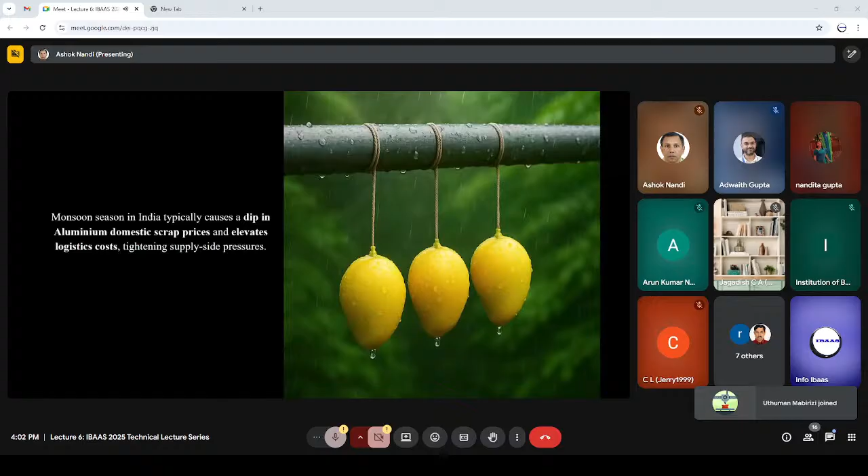A quick overview about the aluminium market in general. I'm going to talk about four aspects: the aluminium powder feedstock, the aluminium alloy additive manufacturing market, the powder bed fusion market, and the AlSi10Mg and other aluminium alloys, how they are optimized and the market around it.

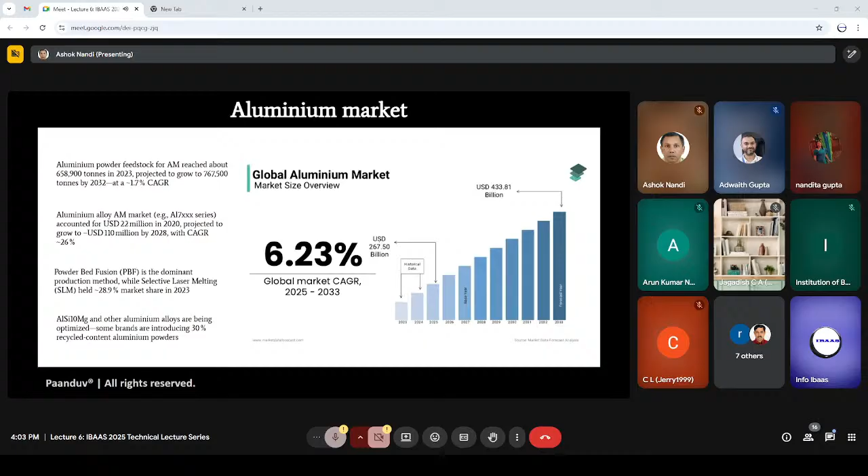If we look at different growth rates, they go all the way from 1.7% up to 30%. But on average, this global aluminium market is growing at a CAGR of 6.23% as predicted for the next 8 years.

Additively manufactured aluminium parts are high performance and offer many interesting mechanical and chemical properties. They have a very high strength to weight ratio and are weather resistant. They are less rigid compared to steel, and there are many other benefits that go around with the aluminium alloys. In fact, when we use cars, there are a lot of components already made of aluminium alloys.

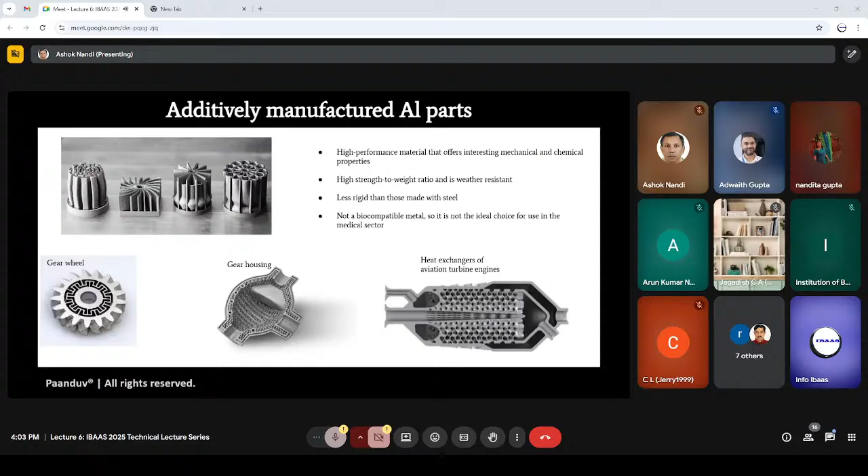However, when it comes to the AM printability or the processability of aluminium alloys, it can be quite challenging. But with challenges comes a lot of scope for research and development and further improving the way aluminium alloys are currently used. For example, when it comes to the printability of pure aluminium, it's quite a daunting task.

However, when it comes to AlSi10Mg and other alloys, it could be an excellent option for laser powder bed fusion type additive manufacturing. Again, if you try to do multi-material welding, for example aluminium and copper alloys, or aluminium, zinc and magnesium alloys, the printability is again poor. It causes cracking, oxidation, poor weldability and problems like that.

However, again, when you talk about aluminium, magnesium, scandium and zirconium sort of multi-material welding, then you can again have excellent printability using either direct energy deposition or laser powder bed fusion sort of additive manufacturing processes.

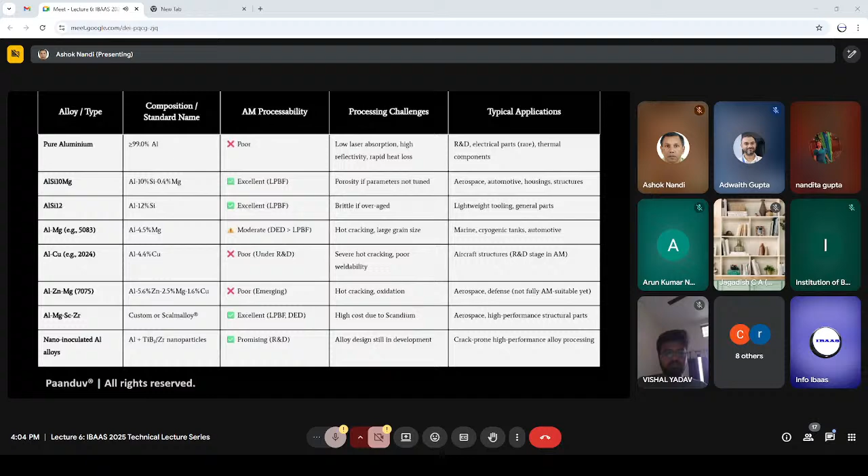When we talk about defects in additive manufacturing, irrespective of whether it's an aluminium alloy or some other alloy, we typically encounter the same sort of defects. They can be more pronounced in the case of aluminium, but the defects remain nevertheless.

For example, we can talk about keyholes, which is one of the most scary defects that all 3D printer users want to avoid: spattering, liquid breakup, extreme porosities whether due to keyhole or other modes of heating, vapor depression, vapor plume ejection, humps that reduce the surface finish of your part, and many other defects that we encounter on a regular basis.

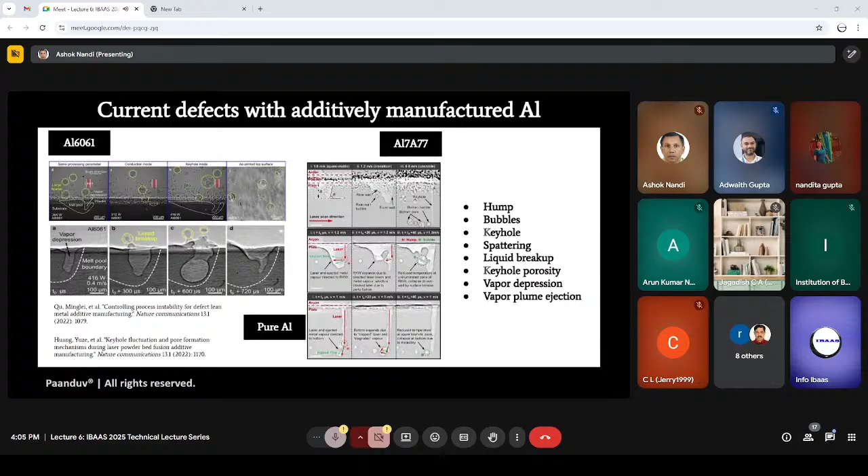Talking a little bit more about these defects, specifically for AlSi10Mg, which is one of the alloys of interest for today's talk. There are many porosity and poor melt pool dynamics related defects. There could be metallurgical pores, keyhole pores, a lot of unmelted powder particles, poor bonding effect, and you name it. Basically every defect that you encounter in additive manufacturing in general can be seen when it comes to AlSi10Mg alloy.

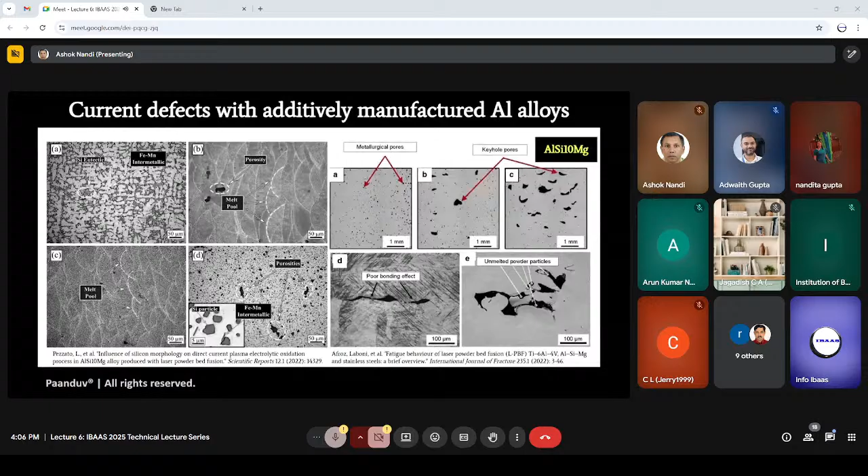This alloy has a lot of applications in aerospace and defense, but it also comes with its own set of defects. There are many ways of getting rid of these defects encountered in additive manufacturing in general, and the same methodologies are also applicable to aluminium and its alloys.

A typical aspiration for an AM process engineer is to provide a sustainable technology, in this case additive manufacturing, to prevent wastage of material not only during experimentation but also during production, to achieve a heterogeneous fine grain microstructure which directly corresponds to the mechanical strength of the built part, and to produce a near net shaped component requiring minimal post processing and finishing. While these are very noble aspirations, a significant amount of experimentation goes into attaining these goals.

At the core of it, much of the experimentation goes around understanding the melt pool geometry and the microstructures using fancy experimental machines. For example, the shape and size of a track relating to build rates, interlayer adhesion, powder layer interaction, powder laser interaction, temperature profile and gradients, and other physics. Their interplay is seen when observing melt pool dynamics using machinery, which unfortunately is expensive but required. Using this data collected from experiments, you can optimize your process parameters.

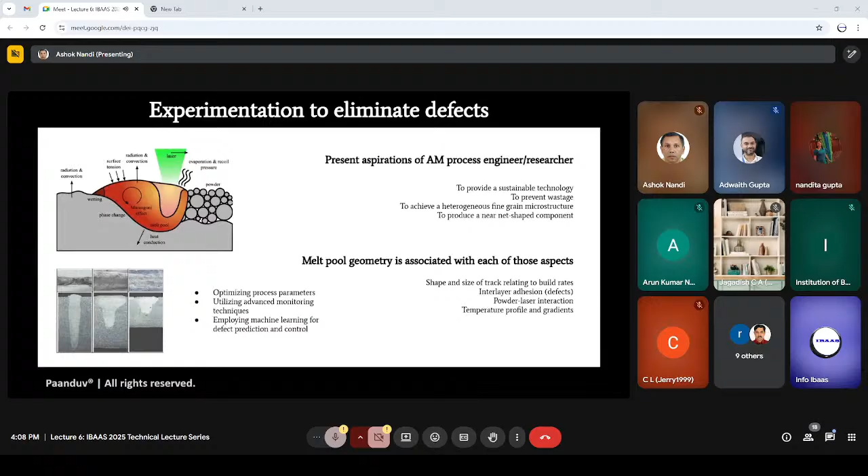You can even employ machine learning from the collected data, and overall the AM process engineer or researcher can attain his goals.

The challenges in experimentation are of course there. The cost of such experimental machines can be quite huge, as can the resources needed for the expertise to operate them. The cycle time could be in the order of months before you get data back from experiments. Then there are material related challenges, process control and reproducibility, human errors, experimental setup constraints, data generation, storage and analysis, defect control and characterization, validation and benchmarking, and the iterative nature of additive manufacturing research.

At the rate at which new materials are innovated at the R&D level, and the speed at which the overall additive manufacturing market is progressing, there's a very fast iteration needed for these sorts of experiments.

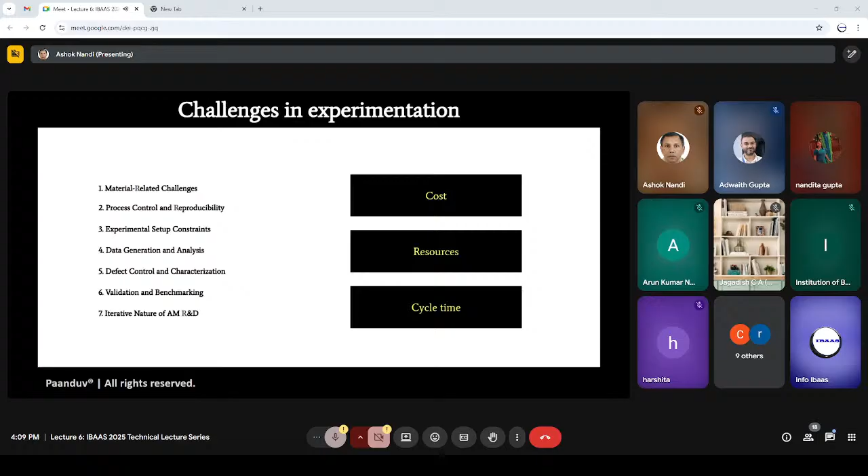The second approach, which can run hand in hand with experiments and significantly take off the load from the experimental work and its associated errors, is high fidelity multi-scale simulation, which can eliminate defects from build.

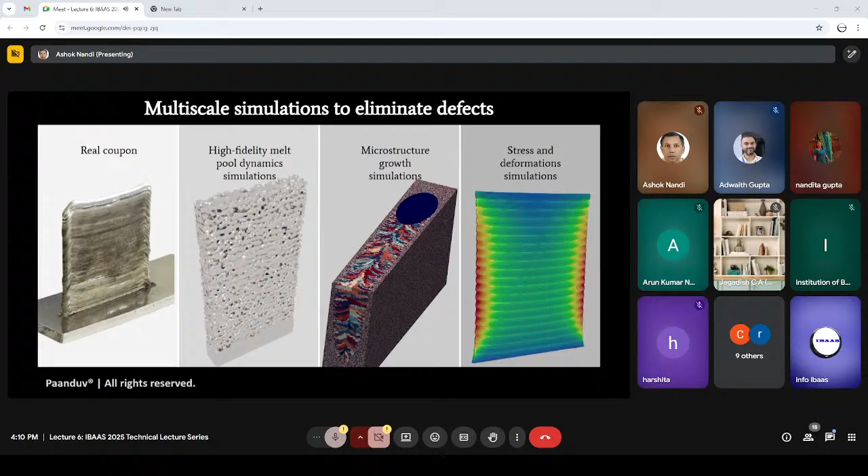The fourth is the stress and deformation simulation, data associated with thermomechanical stress analysis using AM PravaH. In short, predictive modeling is quite capable of capturing some of the very hidden details about defects that can happen in 3D printing processes. It can guide us and point us to the right direction as to what must be changed or optimized in order to produce a very good build, irrespective of the process.

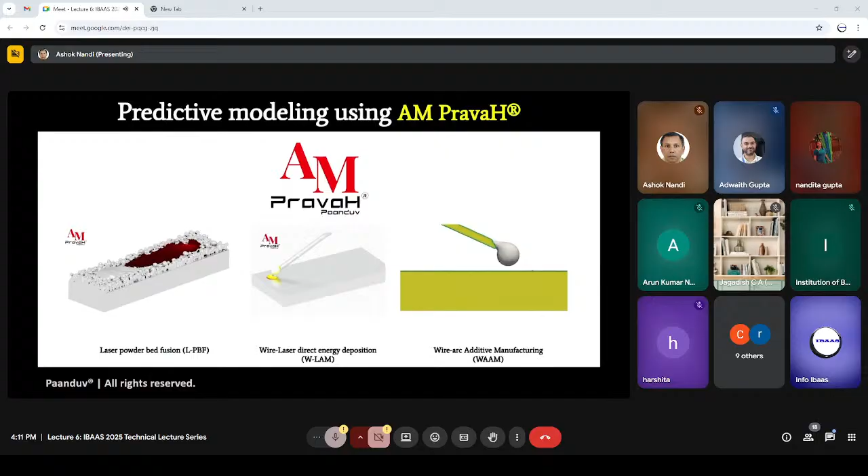Something very tricky to do in experiments is laser beam shaping, because there are standard laser machines that exist all over the world. If you want to make a square laser because you think those lasers are the best in the world, there's simply no way to experiment. The only way left in certain scenarios is through simulations.

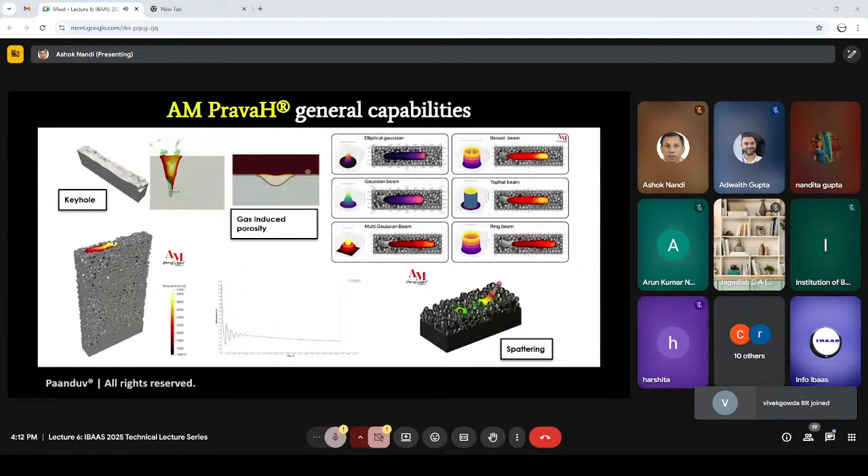The last one is spattering. This is again a very difficult process to capture in experiments given the very high temperatures at which additive manufacturing processes operate, easily 3,000 to 4,000 degrees Celsius, with a very hot vapor plume inside the chamber.

Everything we saw on the previous slide, those defects were captured using melt pool dynamics alone. But there's a solidification aspect as well associated with additive manufacturing processes. That's where microstructure evolution, how your grains are orienting, reorienting, or misoriented based on the movement of the laser over a particular alloy, is very critical.

You want to look at the crystallographic texture, you want to look at inverse pole figures. There are, of course, EBSD machines that can give you these sort of detailed data. But those machines are very expensive. They cannot be operated on a regular basis. They have a huge cycle time for processing the data. And despite all that, you can only probably run one or two experiments every month.

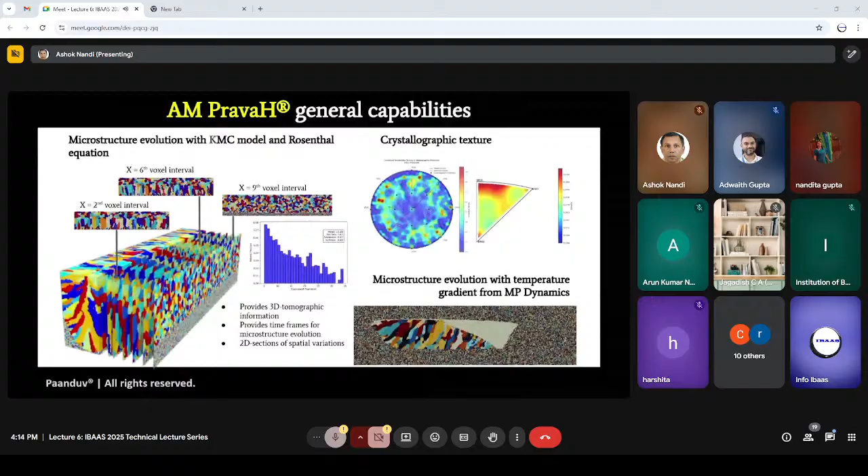But with PravaH's capability of predicting microstructures using kinetic Monte Carlo models along with other coupled models, these results can be generated in a much easier manner in a very short span of time, and you can save a lot of money on that. In fact, everything that you see on this screen is generated from PravaH.

Now, it is very important to couple the melt pool dynamics, which is happening at a continuum scale, where all your momentum conservation, energy conservation, mass conservation, phase change, and solidification are happening. It is very important to couple that entire gamut of computational fluid dynamics with microstructure data.

So the flow of simulations is: you first run high fidelity melt pool simulations, then using the dynamic thermal and solidification fields, you predict the microstructure evolution. In the background, there's a Monte Carlo nucleation and growth model that is taking care of the grain evolution, grain initiation, and their growth.

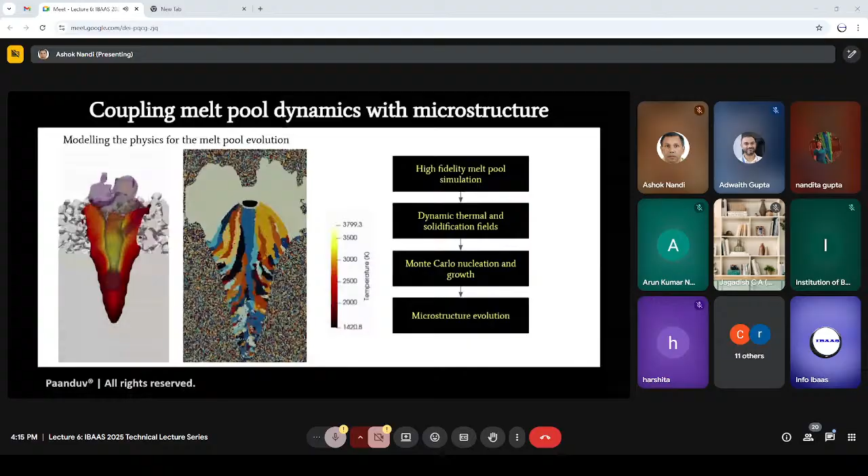So the first two images are coming from the experiments, and just look at the third image, which has come from pure simulation from PravaH's microstructure module. Just look at the excellent overlap of these two microstructure images, and how nicely, qualitatively and quantitatively, the microstructure information is captured using the microstructure algorithms.

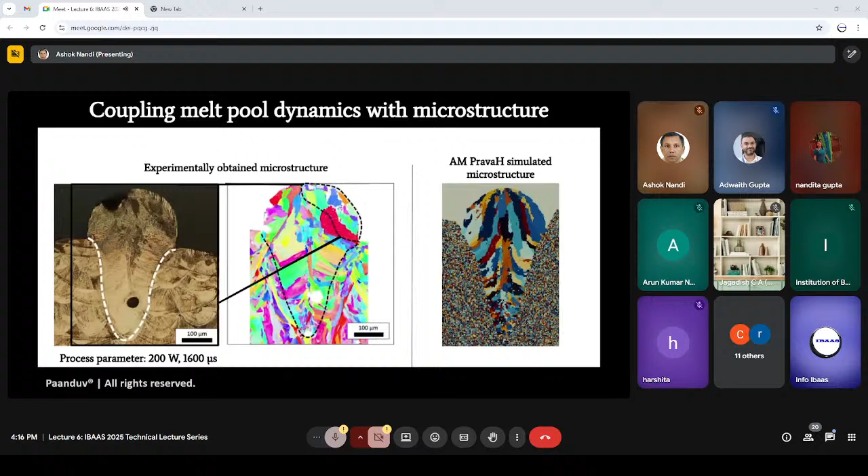What I'm trying to say is that PravaH is world's first all-inclusive simulation software for the AM industry. We understand why it is for AM industry, because it caters to different processes within the AM industry. But more importantly, it is all-inclusive because we are going all the way from powder manufacturing using gas atomizers, plasma atomizers, water atomizers, to powder spreading, to melt pool dynamics, to microstructure grain evolution, and finally to the part scale deformations and stress information.

To my understanding, if you can capture all these five aspects of an additive manufacturing process, you have basically attempted at the best optimal defect-free part production. So we do end-to-end simulation for AM, PravaH for additive manufacturing, using AM powder to part scale.

AM PravaH cuts down the cost by 67% in initial process optimizations, 20 to 30% savings on material costing, and it can reduce the rate of failure by approximately 10%. It saves experimental trials and characterization, and sometimes it's not about saving the number of trials, it's about doing the right type of experimental trials.

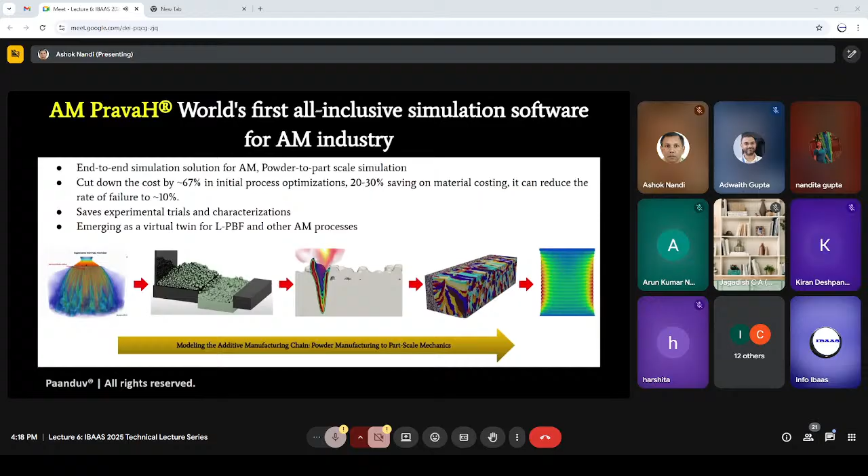You don't want to take a very diverse set of experiments just to figure out something close to optimum. You can attain a close to optimum solution using simulations, and then around that optima you can do more experimental trials. And clearly for AM processes, including LPBF, this could emerge as a very good virtual twin as well.

Today, for the purpose of this talk, because there's a huge audience, I presume, which will be very interested to know about the simulations of additive manufacturing processes—it could be LPBF or just good old welding process for different alloys of aluminium, or pure aluminium, or aluminium and copper welding.

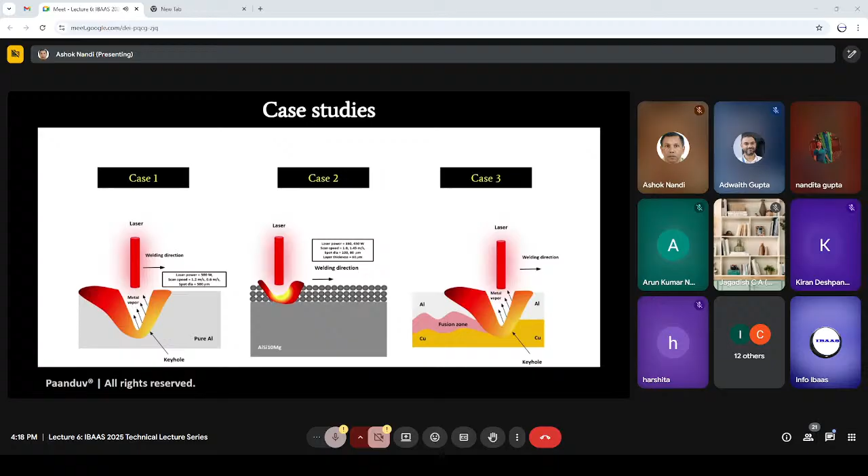So in the first case, we'll be looking at pure aluminium. In the second case, we'll be looking at AlSi10Mg alloy, and in the third case, we'll be looking at a multi-material weld of aluminium and copper. We'll see how these simulations give us different insights about these processes and how well they compare against the experiments.

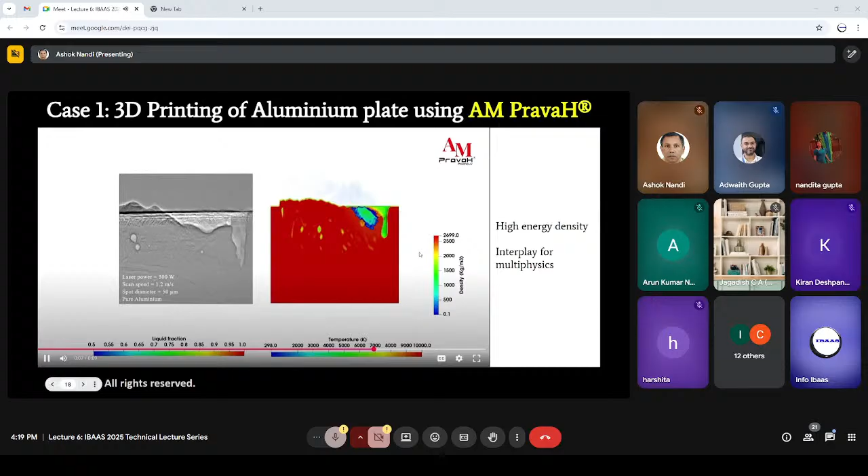Case 1 is the 3D printing. Notice the defect formation, the pore formation, the hump formation, and you name it. While this simulation may look quite straightforward, the amount of physics equations that are solved in order to capture this process accurately has been quite challenging.

I want to play another video from a different angle and at an even higher fidelity. Just look at the pore formation, how some of the pores are stuck in the solidification phase, some of them get ejected out. Even observe the plume, the vapor plume. I will play this one more time. Just observe the vapor plume which is coming out from the melt pool.

This is one of the rarest solvers in the entire world which captures the vapor plume in its full glory. Most of the solvers that we have either have the solid alloy phase, or the molten phase, and that's it. But in our case, we have the solid alloy phase, the molten alloy phase, the metal vapor phase, and the fourth phase, which is shielding gas. All these four phases are captured and simulated in completeness so that we get the most accurate results.

Now let's look at some of the experimental comparisons. So we are looking at the front wall of the weld of the melt pool in this case, which is quite important in understanding the defects and how well the overall surface finish of your build part would be. So the front wall experimental angles were reported to be 85 degrees.

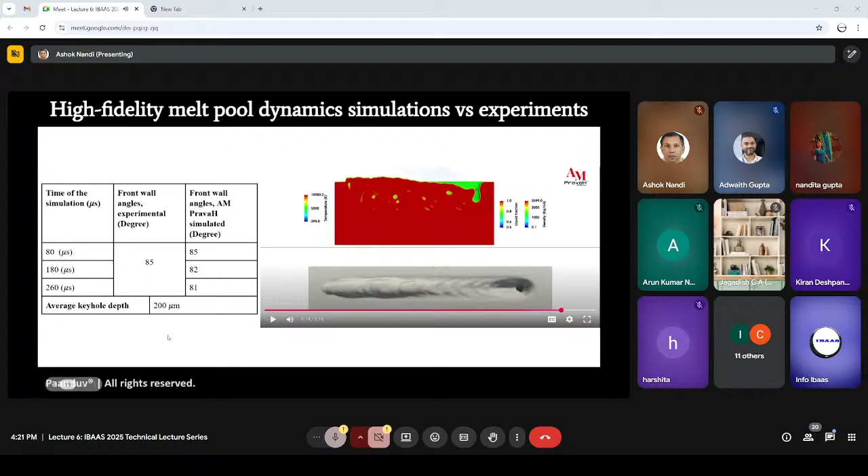5 degrees short of 90 degrees, and what we are seeing at different times from the simulation: at 80 microseconds we are seeing 85 degrees, at 180 microseconds we are seeing 82 degrees, and at 260 microseconds we are seeing 81 degrees. Average keyhole depth is 200 microns, and we are also observing very similar depths in our simulations as well, around 200 microns as well. So very nicely matching the experimental data despite all the complicated physics that goes behind it.

Again, I want to highlight the pore formation and the hump formation. All the mass which has ejected out from the melt pool has gotten deposited over the top, as you can see on the experimental image on the right hand side in the big oval, and then on the left hand side again you can see a lot of deposition of material behind the melt pool.

Similarly, the pores are almost spherical in nature. As we can see in the experiment and in the simulation, the pores are not only spherical, they are almost at the same location. So if you observe this particular circle, and this particular circle, they are quite identical. Then you have another pore here, you have another pore here. This pore is probably this one, and then even a pore is formed here, which you can see a slight hole. You can see a slight hole right here.

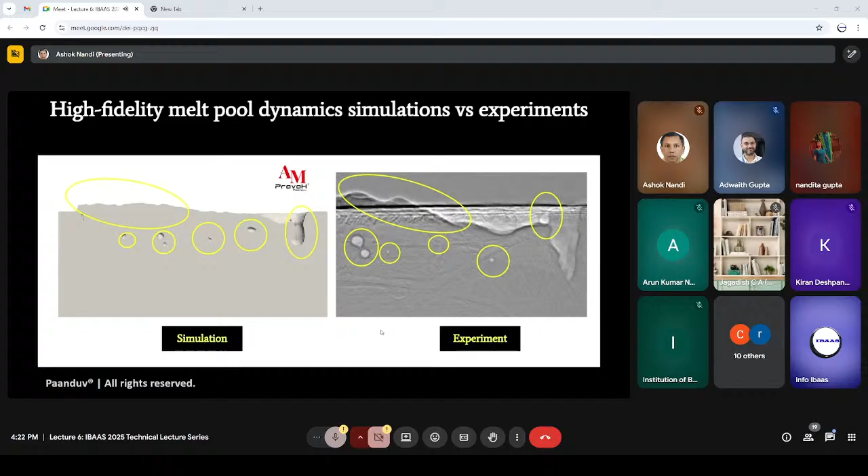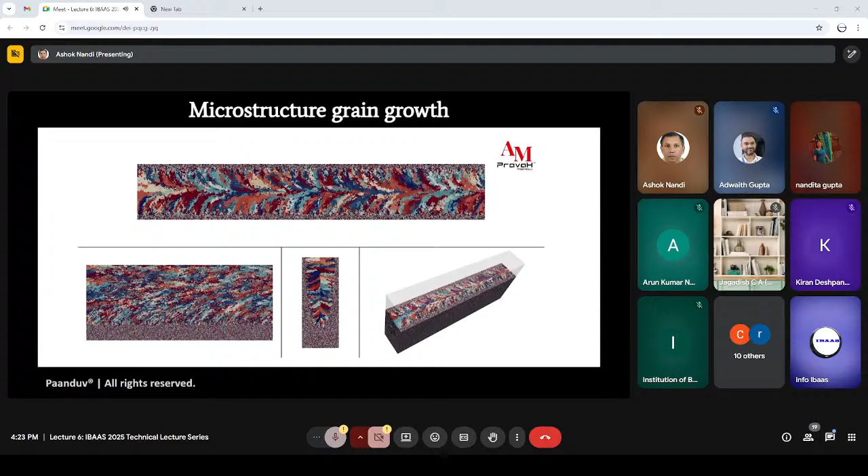The analysis is incomplete if we don't comment or talk about microstructure grain growth. I won't be comparing this against experimental data here due to the lack of that sort of data, but you can see how nicely and how in great fidelity the microstructure information is also captured for this pure aluminum plate laser interaction. You can see equiaxed grains, you can see columnar grains, and such.

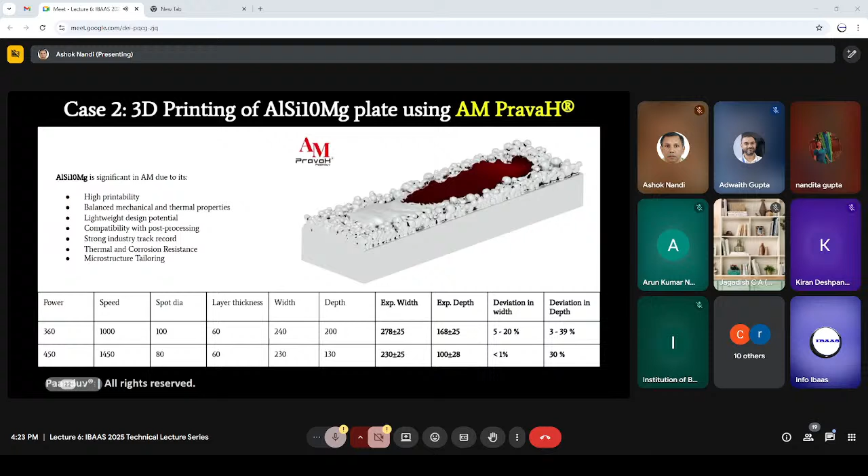In case 2, I'll be talking about AlSi10Mg plate using AM PravaH. Let's play the video first. Again, I want you to appreciate the particle dynamics aspect of it as well. You see how nicely the particle bed is prepared over the alloy substrate using discrete element modeling without any approximations at all, and you see how nicely the melt pool is progressing as the laser progresses over. There's of course an aspect of vapor which is hidden for better post processing here, and you can see how the bands are formed, as is the case in real 3D printing melt pools.

AlSi10Mg is a huge thing in additive manufacturing because of its high printability. It has a balanced mechanical and thermal properties set, lightweight design potential, compatibility with post processing, strong industry track record, thermal and corrosion resistance, and microstructure tailoring. So pretty much everything that you desire from an alloy is done using AlSi10Mg. No wonder it's of interest to the users.

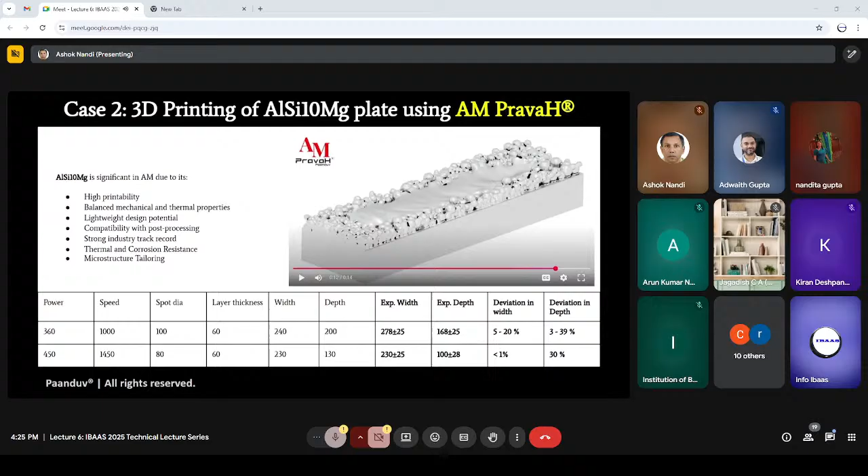We have done a couple of variations, compared it with experimental data for different power, scan speed, and spot diameter variations, and the width and depth reported in simulations match quite well with the experimental width and depth. Again, melt pool depth and width are the first step in identifying the mode of heat transfer, whether it is keyhole dominant, conduction dominant, convection dominant, or radiation dominant, and accordingly much of the defects that are formed can be understood. So the deviation when it comes to width is 5 to 20%, or in the second case it's under 1%, and deviation in depth is 3 to 39%. So again, we are talking about errors typically in the range of maybe single digit percentage, all the way up to maybe, if you take an average of the second one, perhaps 15 to 20% error.

Without commenting on the pore amount, these pores could be formed from trapped vapor, and they can also be formed because of trapped shielding gas. So commentary on the pores is quite important in understanding the overall structural integrity of the melt pools.

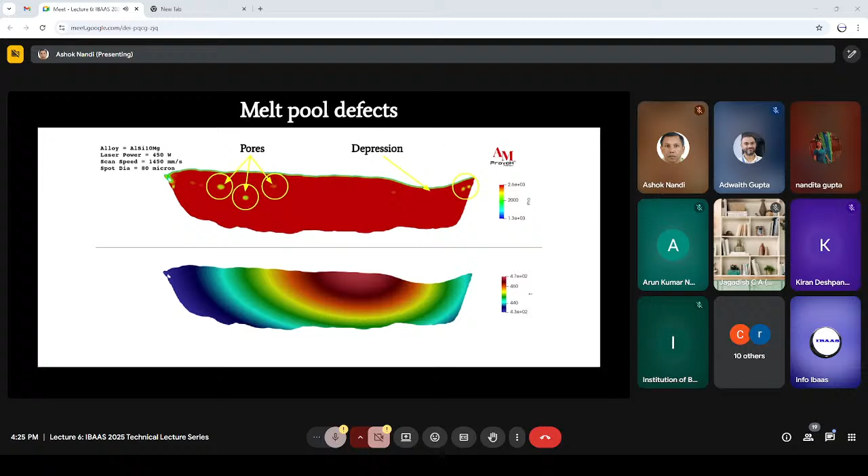Moving on to the structural defects, because microstructure data can give you very good pointers towards how well this particular build part is going to behave when it comes to mechanical properties and mechanical strength of the build.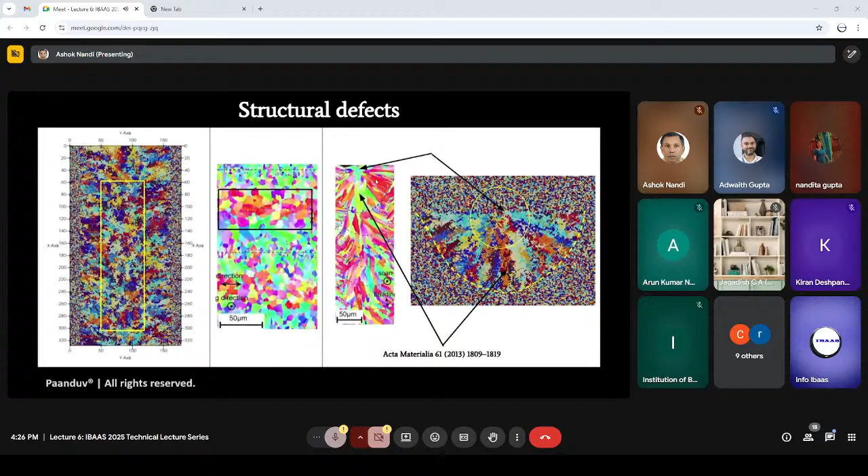The leftmost image is coming from AM PravaH, the second image is from experiment, the third image is from experiment, and the fourth image is again from AM PravaH. If you look at the arrows, the equiaxed grains match quite well in the first two images, and equiaxed and columnar grains match well across the cross section in the last two images.

You can estimate the structural property using many empirical formulae, or you can do other sorts of analysis. That is in the hands of the material scientists or mechanical engineers, how they really want to use this microstructure data.

But in the past, this microstructure data has been used with a strength mechanism, the Hall-Petch equation, to predict the yield stress of your build part.

To do that, the PravaH software not only gives you images, but also the entire 3D grain information, giving you the mean, standard deviation, and higher moments for that data, so you can use this mean grain size in the Hall-Petch equation or other equations of interest to predict the yield stress, hardness, corrosion resistance, and other mechanical properties of a build part.

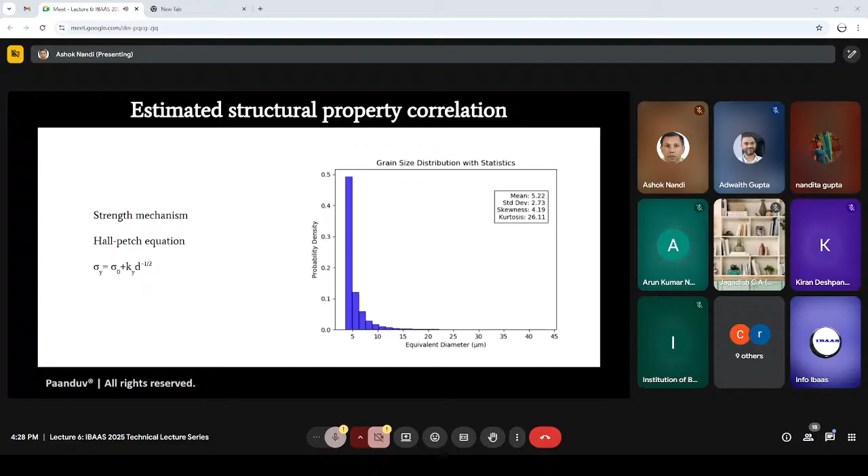The third case I want to talk about is aluminum-copper multi-material welding, a relatively new development in our team. I want you to appreciate that the number of phases here is quite huge: there's a copper solid phase, a copper melt phase, an aluminum solid phase, an aluminum-copper phase, and then a laser is shot down, first penetrating the aluminum phase and then the copper phase.

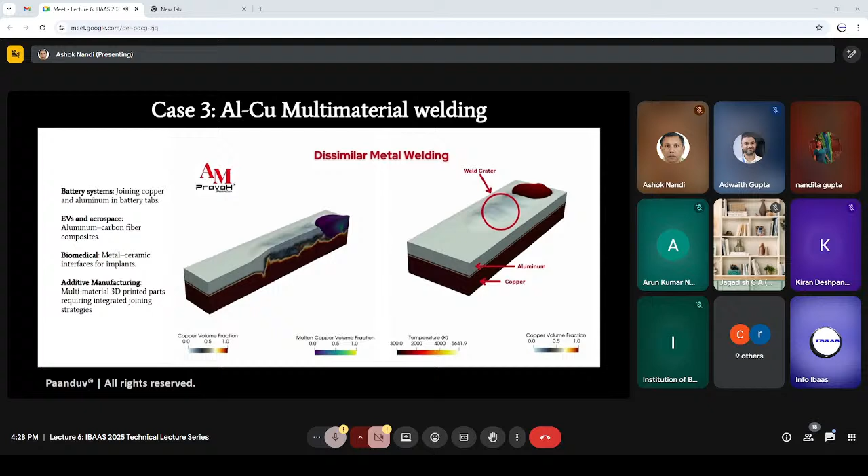Look at the fusion of this interface, how nicely copper is fusing into aluminum and solidifying, and a little hump is formed. If you look at the right image, this is also called a weld crater.

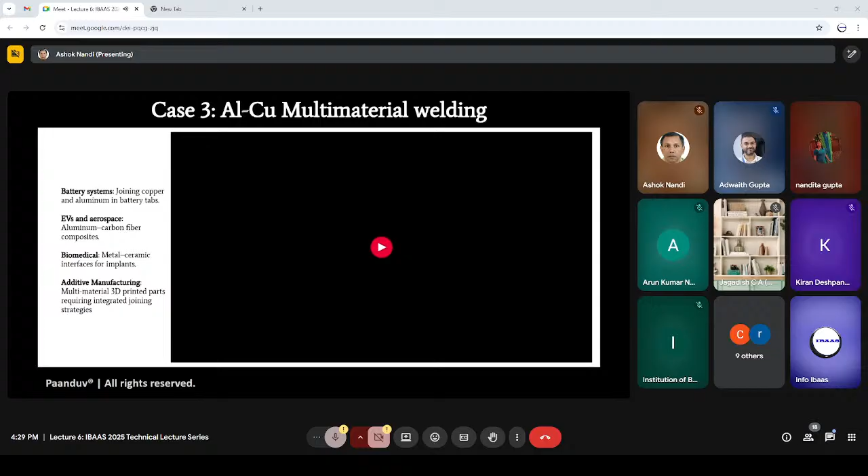These scenarios come up quite a lot when you talk about battery systems, where we want to join copper and aluminum in battery tabs, aluminum-carbon fiber composites in electric vehicles and aerospace, metal-ceramic interfaces for implants in biomedical, and of course in additive manufacturing, there's a lot of R&D happening in multi-material 3D printed parts requiring integrated joining strategies.

Now, one chunk we haven't talked about, right at the beginning of this simulation cycle, is powder production. When you talk about melting a part using a laser, there's always some form in which that metal comes in—it could be a wire or particles. In most cases, it's either wire or particles. A wire may be a simpler process,

but the powder production in itself is quite a challenging process, and there's a limited number of atomizers available to do that. If you want to atomize and produce your powder particles using an atomizer, where you have very high speed guns of water, gas, or plasma hitting a chunk of your metal and atomizing it, that's one way to go.

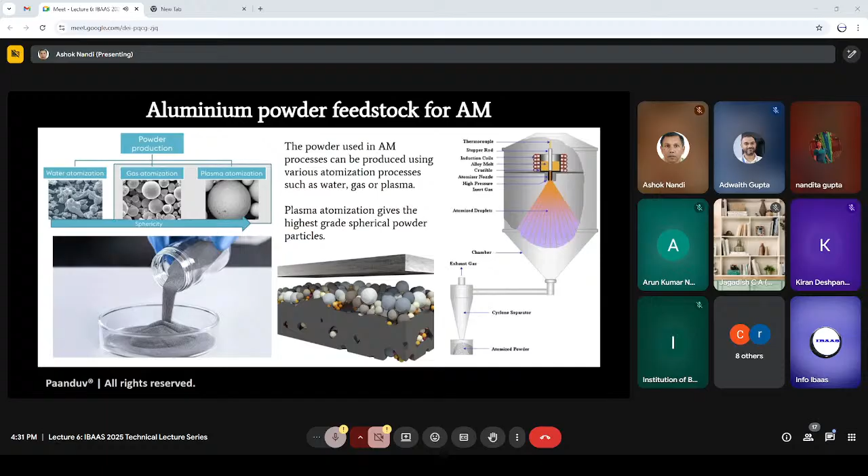That is one way where you can simulate and work with poor powders. Another application of PravaH is direct atomization simulation, because even with a gas, plasma, or water atomizer, it is quite tricky to adjust process parameters to get the desired sphericity. We have done work on supersonic inert gas atomizers, where a small solid metal block sits in the center and gas reaches Mach speeds up to 4.5. At that speed, the inert gas impinges onto this metal block, atomizing the particles.

If you look at the bottom plot, you can see the powder size distribution obtained after this atomization process. You can imagine the physics and the coupling of physics involved here is quite extreme.

You have gas-liquid interaction, which is multi-phase flow. We're talking about primary breakup, where the molten jet is disrupted by high velocity gas jets, and secondary breakup, where large ligaments or droplets disintegrate into smaller droplets. You have compressible gas dynamics, with high Mach number flows requiring the compressible form of momentum equations. You also have surface tension and capillary instabilities.

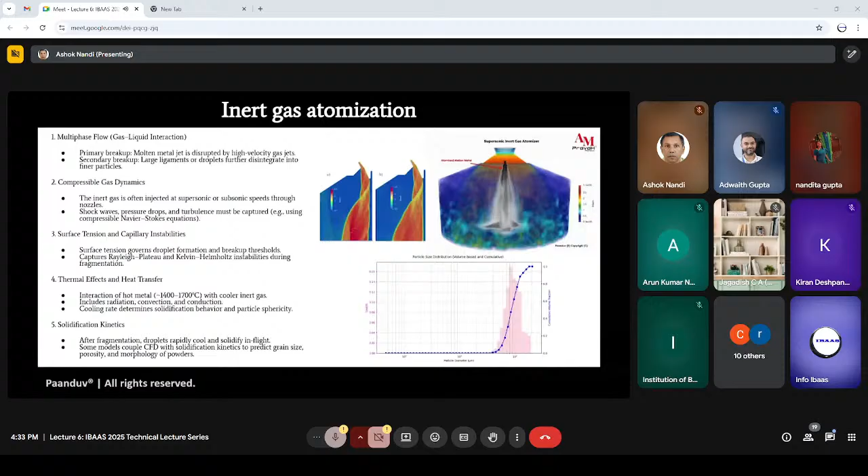You have temperature-dependent surface tension because temperatures can go quite high, leading to instabilities. There are thermal effects too, heat transfer from the interaction of hot metal with cool inert gas, including radiation, convection, and conduction. At the very end, once atomization has happened, these powder parcels travel down under gravity and solidify midair. This is where fragmentation, droplet rapid cooling, and microstructure all become important as we try to simulate powder manufacturing.

All in all, with the invention of PravaH, we are trying to upgrade every company's technology to its cutting edge, especially in the field of aluminum industry, by making high fidelity physics-based computational engineering an integral part of their workflow.

We have been very fortunate to be associated with some of the top innovators, research labs, and engineering companies all over the globe, who have provided their data, worked with us, and trusted us to provide solutions that are typically quite complicated and cannot be dealt with using existing commercial software. So a lot of thanks to these companies and collaborators.